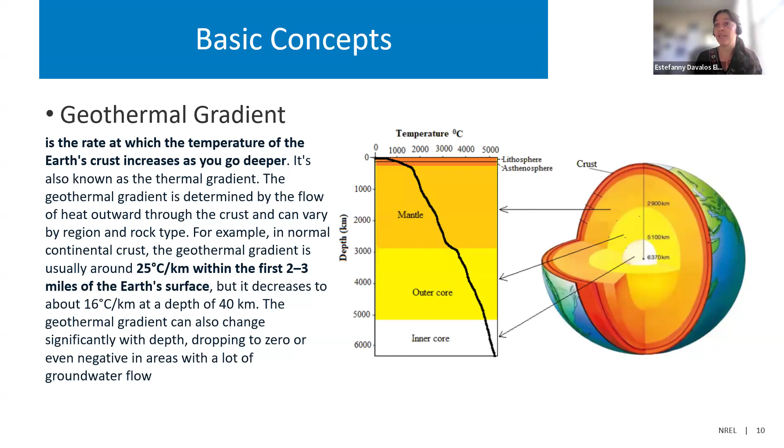Next slide, please. Let's keep in mind that not all the resources are coming from the inner core of the earth. There are some geothermal resources of low temperature that are coming from the sun, being stored in the earth's surface. That heat from the sun is basically absorbed in the soil, and you can store that temperature. Basically, these geothermal resources are shallow and low temperature. There are some geothermal technologies, such as geothermal heat pumps that we're going to explain in a couple of slides, that you can use to utilize these shallow geothermal resources.

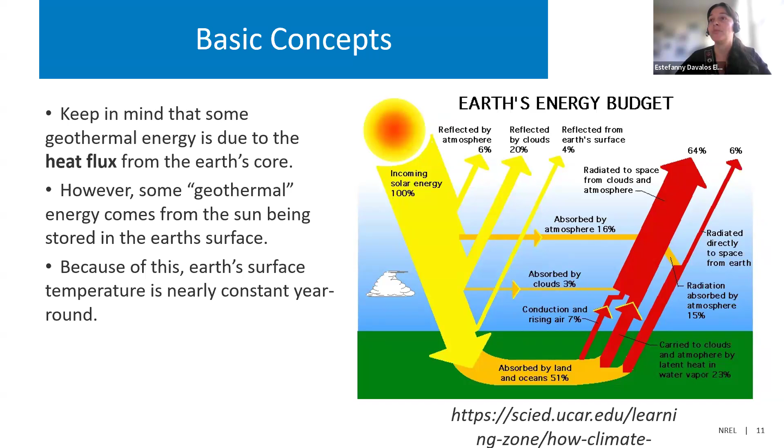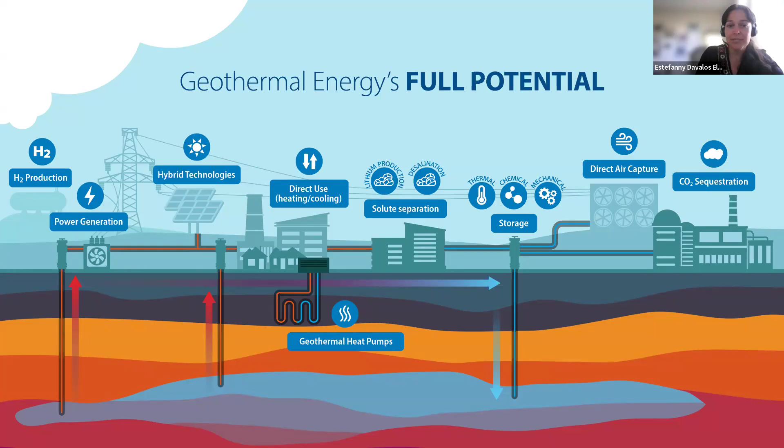Once you start finding more temperature, such as more than 100 degrees Fahrenheit, you can start using this heat extraction for other direct uses. You need water for these - for example, hot water at that temperature to use for greenhouses, fish farming. You can also use these direct uses for heating and cooling. Once you find higher temperature resources, you can generate electricity, and there are different geothermal plants depending on the different temperatures, but basically electricity generation happens when you find a resource of more than 150 degrees Celsius, or in this case, 250 degrees Fahrenheit.

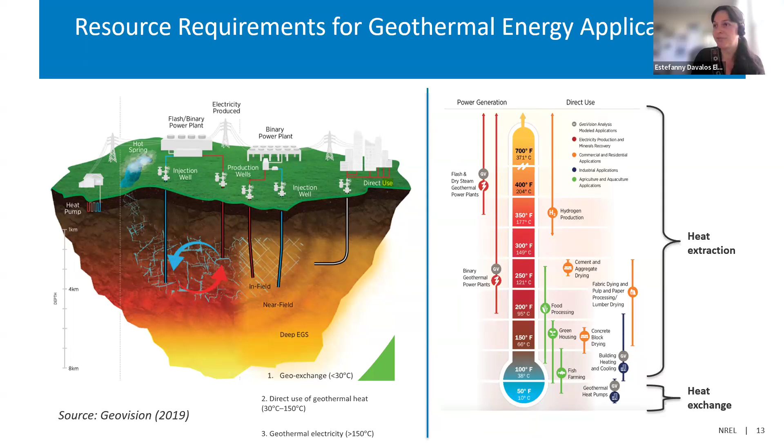Here I want to highlight the importance of geothermal resources in the future of decarbonizing the United States. For electricity, we expect to generate 8.5% of US power by 2050, which will allow us to avoid more than 500 million metric tons of CO2 into the atmosphere. There's also heating and cooling applications that we can develop, with more than 23% increase in the market by 2050.

I want to highlight that heating and cooling can be done using geothermal heat pumps or direct uses. Direct uses means finding the hot water directly. But geothermal heat pumps have the advantage of being a technology you can use across the whole country—it's not limited by finding hot water at different temperatures, depending on the geology and other aspects of the resource.

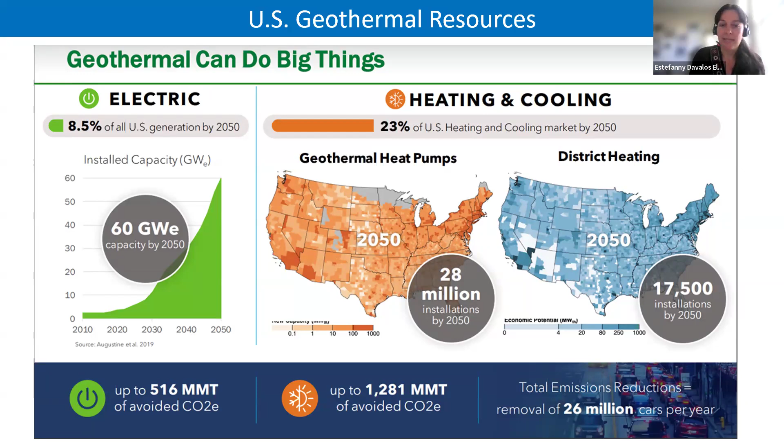Okay, next slide, please.

I want to explain very briefly, in terms of technology, these geothermal power technologies. I'll just explain the conventional geothermal resources, because that's the technology already being used in the market—it's already proven, it's already there.

The limitation of this technology, as I mentioned, is that it's focused in different areas of the country, mostly in the western part of the US, where you can find high temperature resources. Also for this technology, you need a heat source—it can be a volcanic source, which is why you have these high temperature resources.

You also need fluid accessibility, so you need to find water, hot water. You need permeability to allow this water to come to the surface or shallow surface so you can extract it. Sometimes you also need a seal—a layer that creates a trap that avoids the heat and water from being lost.

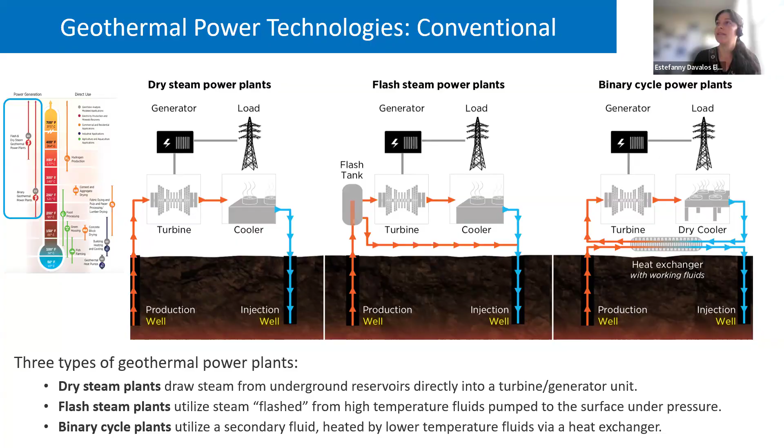Okay, next slide please. So I'm going to start explaining some of the geothermal low temperature technologies, because I think those are probably the ones you are more interested in, like applying in your rural areas.

We can divide these low temperatures into direct uses and geothermal heat pumps. Here I'm going to explain the direct uses of geothermal. Basically, these direct uses need hot water to use these geothermal resources. You can find favorable areas with this resource, and most of the hydrothermal systems are located in the western part, but that doesn't mean you cannot have those in the central or eastern regions - they're just more dispersed there.

The range, as I already mentioned, is between 100 degrees Fahrenheit and all the way to 250 degrees Fahrenheit for the direct uses.

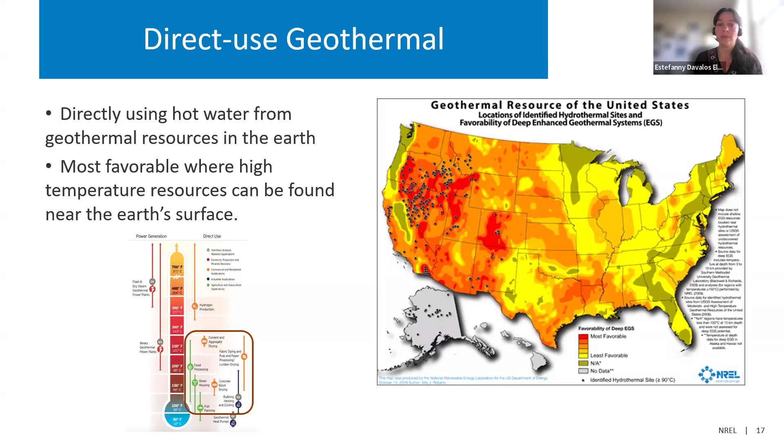You can start with electricity generation, but if you don't have that high temperature resource and only have medium, you can start with heating applications. Then once the temperature of the fluid is lower, you can utilize that for agricultural purposes, such as greenhouses, heating and fish farming, drying crops, etc.

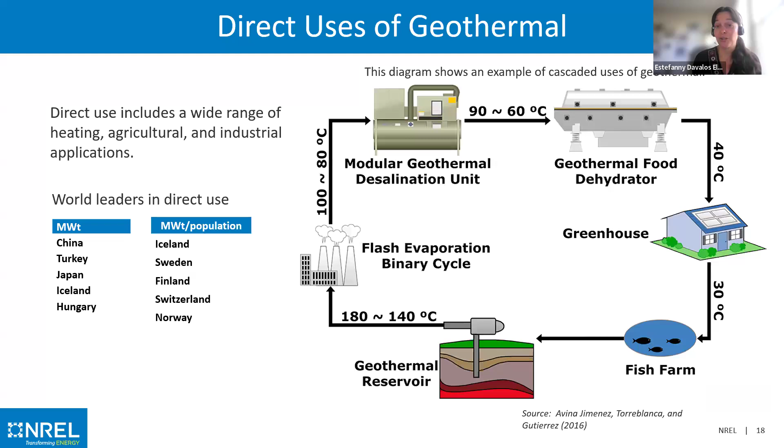This effective approach maximizes the energy use from a single geothermal resource, and it's very environmentally friendly and cost effective. Okay, next slide please.

Here is just an example of how we can use these direct uses. This is combined with another technology, geothermal heat pumps, but I want to mention that there are different direct uses - you can do shallow geothermal heating and cooling technologies, or deep geothermal heating technologies, with these direct uses.

The difference is that you can have a shallow aquifer where you use that temperature for cooling or heating buildings or districts. In the deep geothermal heating, you drill a bit deeper to find the temperatures you want to also heat and cool buildings.

Basically, most of the direct uses are going to be open loop technologies. These wells for direct uses depend on where you find the resource, but you can have depths from 150 meters to 2 kilometers.

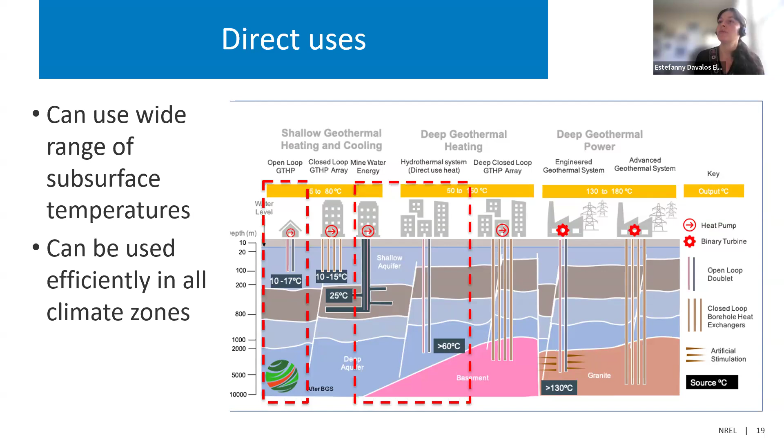Okay, next slide please. Now I'm going to talk about the geothermal heat pumps. These geothermal heat pumps are the ones where you don't need to go very deep - it's just in the shallow part of the earth.

Basically, you are finding this resource in the ground. It has high efficiency due to the constant and moderate temperature you can store in the soil, and you can use this technology for cooling or heating. These resources can be used with temperatures of less than 50 degrees Fahrenheit.

We also know this technology has different names that you can call it, such as ground source, ground coupled, geo exchange, earth coupled, earth source, or water source. Next slide please.

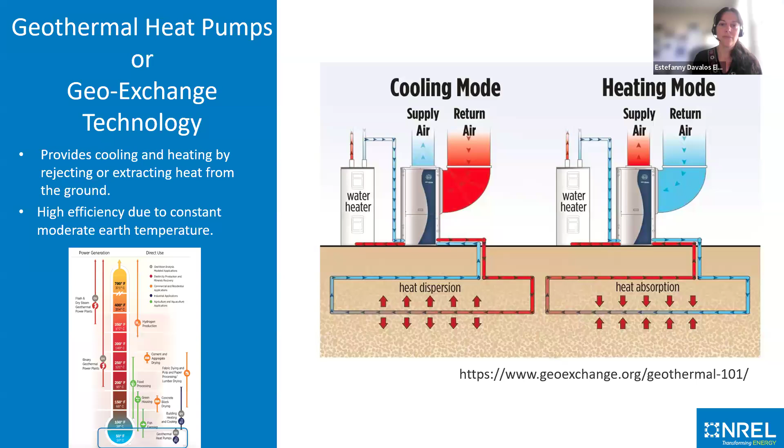So here I just want to explain how these geothermal heat pumps work. A heat pump operates by transferring heat from one place to another using a refrigerant and different components like the compressor, the condenser, the expansion valve, and the evaporator.

In heating mode, the refrigerant absorbs heat from the soil, from the ground, as it evaporates in the evaporator. This low pressure gas then moves to the compressor, which raises the pressure and the temperature. The hot, high pressure gas then flows to the condenser, where it releases heat into the home or building as it condenses back into a liquid state. This refrigerant then passes through an expansion valve, reducing its pressure and allowing it to cool down before returning to the evaporator to repeat the cycle.

In cooling mode, the process is the reverse, extracting the heat from the building or house and expelling it into the ground, basically.

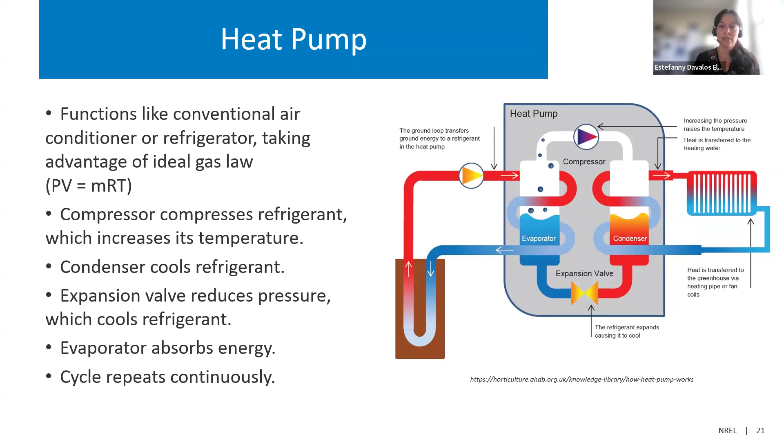Here we have different configurations of how these geothermal heat pumps work. So you have basically three types. They are all closed loop, but the first figure on the top left is a vertical closed loop. The one on the right is horizontal, and the one below is a closed loop system using a pond or a lake.

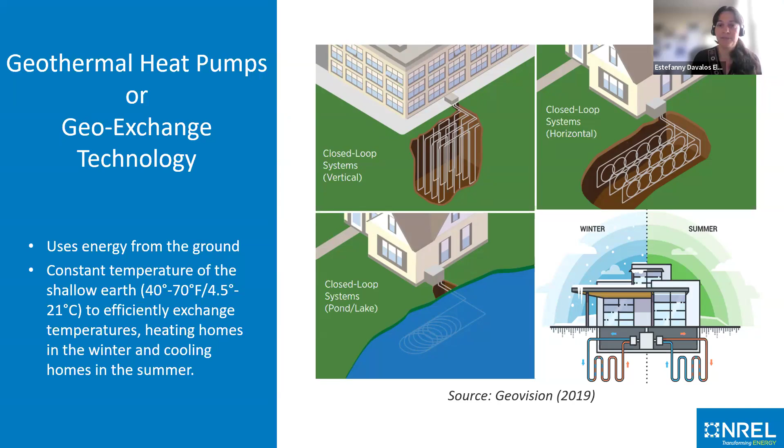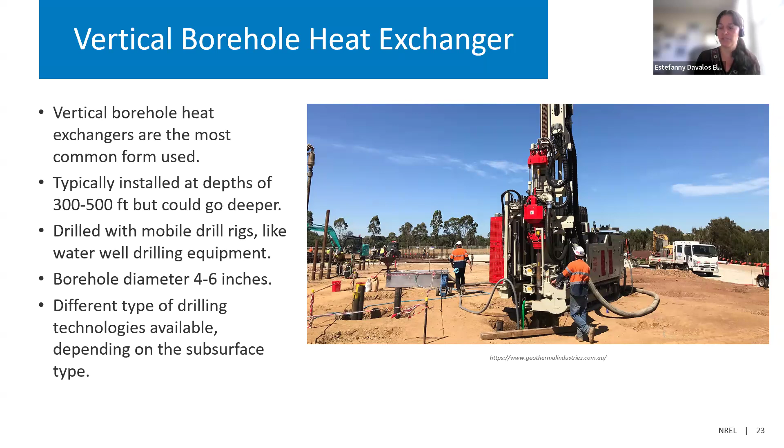The vertical borehole heat exchangers are the most common form used for geothermal heat pumps. Typically you need depths of 300 to 500 feet, but it could go deeper as well. You just need mobile drill rigs like the ones used for groundwater, and the borehole diameter can vary between 4 to 6 inches. There are also different drilling technologies available to create these vertical boreholes for heat exchangers.

There are different types of vertical boreholes. We have the U-tube, which is basically a single U-tube, a pipe connected with a U-bend at the bottom, as you can see in the figure on the left side. It's a closed loop, no fluid exchange with the environment. The area between the U-pipe and the borehole wall is grouted to prevent groundwater contamination.

There is another type, the double U-tube, which is basically two or more U-pipes that can be connected in series or parallel. This decreases the resistance to heat transfer with the soil. The other one is coaxial, where fluid is pumped through the center of the pipe and an annular region. This one requires a casing.

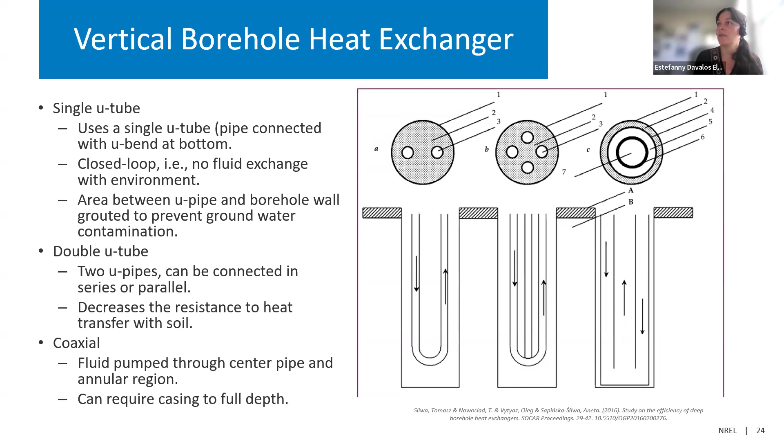As I already mentioned, there are some important aspects of the vertical boreholes. The diameter can be 4 to 6 inches. The pipe can be high density polyethylene, and you have a grout that can be a clay or bentonite mixture to maintain thermal conductivity in the soil. And you have a fluid that can be water with a bio inhibitor, which can be used in cooling-only applications as well.

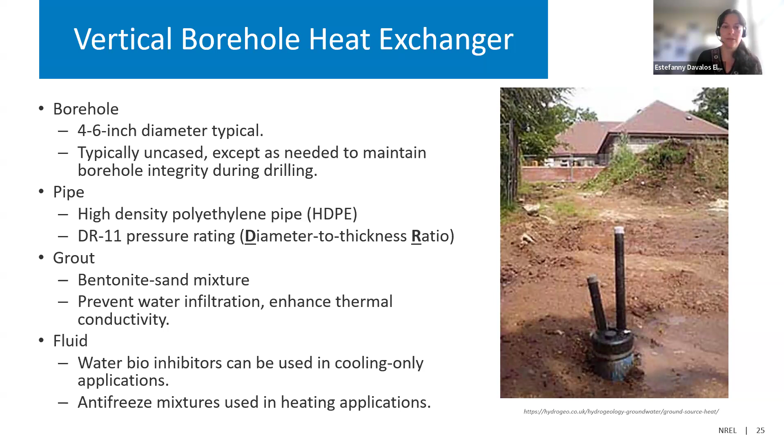The horizontal heat exchanger is another type. This one is a little bit shallower, so it can be installed in the top 3 to 10 feet of soil. You need a higher surface area to make this installation. It has a lower cost to install because you don't need to drill. The performance is lower than the vertical system because the soil temperature is closer to the ambient air temperature during the year.

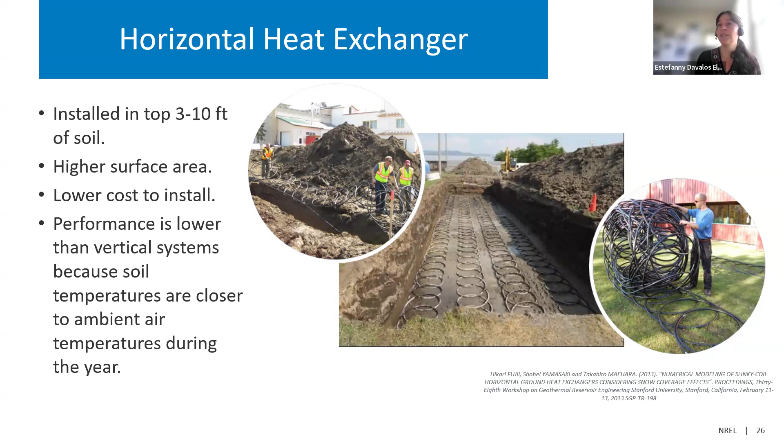This is a surface water heat exchanger where you can use a pond. If you have a lake or pond on the surface, you can use it for this heat exchanger. It can be used effectively when water surface is available, and if designed appropriately, it can be removed so you can do service for these systems. Sometimes it needs freeze protection if you have lower temperatures.

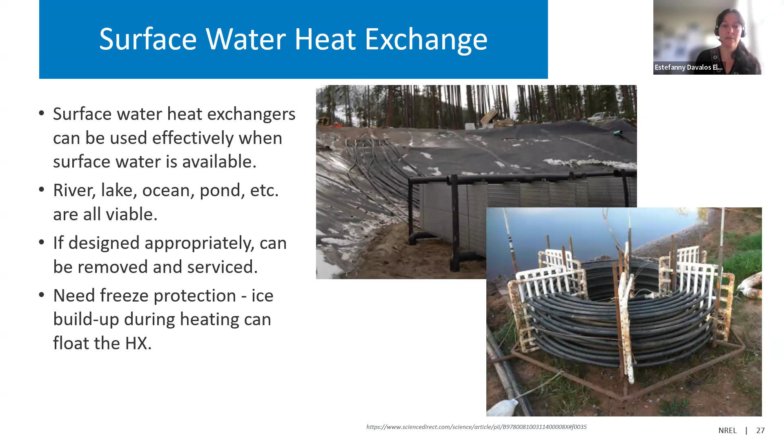Let's talk a little bit about the benefits and considerations for these geothermal heat pump systems. They are very efficient, I think higher than air heat pumps. They have low maintenance and heating savings. Also, this technology helps to decarbonize the country.

Some important considerations are space considerations. As you already see, the vertical system doesn't need a lot of space, but the horizontal loops need a big space, so you can use parking lots, buildings, or green spaces to install this type of technology. The climate zone is also an important aspect, because it will drive the building or home's consumption of heat or cooling.

Also, the geothermal heat pumps depend on the design and the requirements depending on the location where you are installing. And the soil properties are another important aspect here, because the soil properties affect the thermal conductivity and whether the soil is moist or dry. So you need to consider all these to design your system.

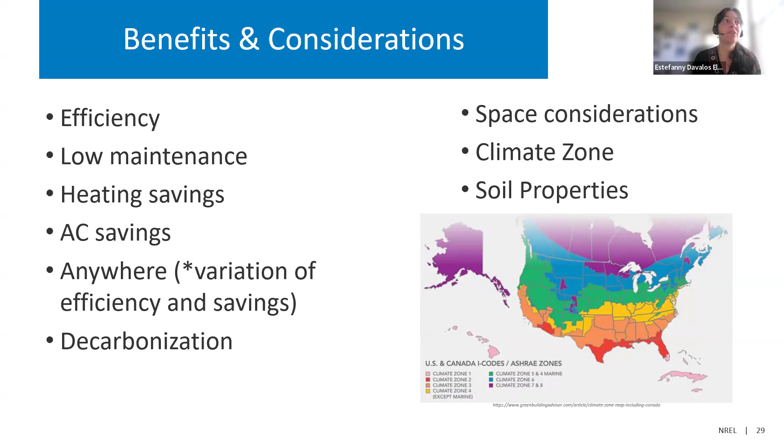My name is Diana Acero Allard, also a researcher here at NREL, geothermal researcher. In the next slides, I am going to show you some applications that are public out there for agricultural activities. I just want to give a disclaimer: to my knowledge, none of these received any technical assistance from NREL. This is information that's publicly available for everyone, but very interesting applications.

One of the first ones is a farm in northern Michigan where they use geothermal heat pumps to heat a greenhouse but also to cool a fridge. So they use two applications there, heating and cooling. There are some specificities about that - the idea is to keep the greenhouse floor always at 90 degrees Fahrenheit. This is claimed on their website - if you look for Coveyou Farm in northern Michigan, you'll see the efficiency and cost effectiveness of the systems.

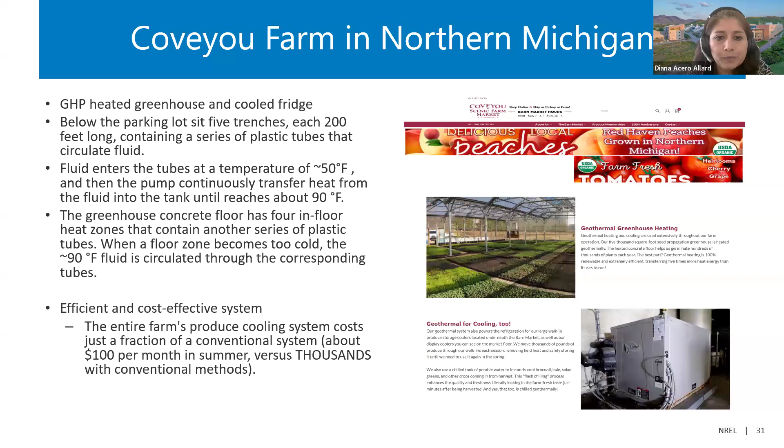During summer, they were paying thousands of dollars before for conventional methods. With these systems, they lowered that to hundreds a month. So it's efficient - it works for both heating and cooling in the northern Michigan zone, for summer and winter. Next one.

This is an example of a greenhouse in Nebraska where they grow citrus fruit, some figs, and other types of fruits. What they use there is a system that comes not only from the geothermal source but is also coupled with other components to take advantage of the solar heat they receive during winter, always keeping that greenhouse above 28 degrees during winter.

One of the resources from the ground is heat at 53 Fahrenheit, only 8 feet deep. It's also mentioned that it has some indirect benefits to decarbonization for transportation, when you think about transporting all this fruit or produce to other parts instead of producing it in the same place - so it removes this transportation component. That's another benefit of these applications. Next.

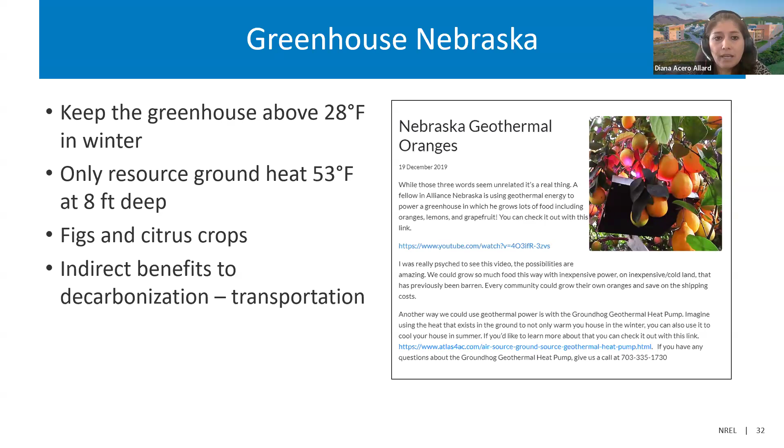This is a very special example - an educational camp in Georgia, in the southern part of the country. Here they use different types of renewable energies for education and for the sustainability of their activities. The geothermal ground loop they use is actually groundwater that is strategically placed in wells to help condition the air in the building.

So we see heating and cooling, we see keeping temperature stable during the year, and also helping with other activities important for agriculture, like air conditioning. Next.

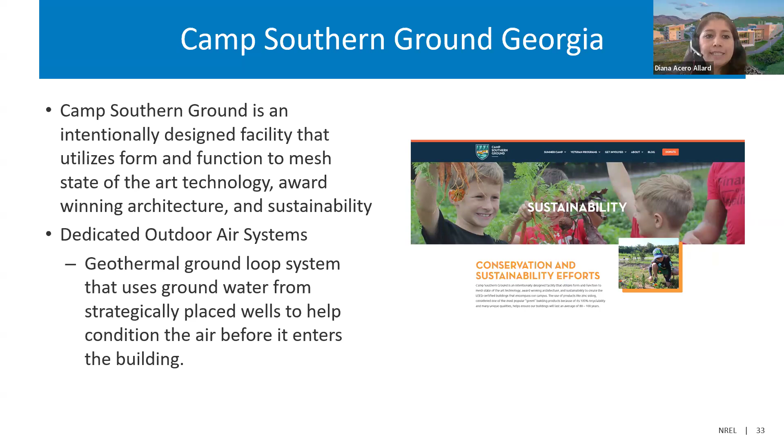When we talk about project development and cost, we compare a little bit with other systems sometimes, and here are some considerations for the cost. The ground heat exchanger, that is the system, is the biggest part of the cost. As Estefanny showed us, it involves drilling and other activities, and that part is the biggest part of the cost.

The actual ground source or geothermal heat pumps are more expensive than air source heat pumps. However, it comes with other benefits and savings in the long term. If the system that is designed needs circulation pumps or other additional components, that can add to installation and operations cost.

When we talk about lifetime, geothermal or ground source heat pumps have a lifetime of 20 to 25 years, while the air ones have something between 10 to 15 years, so something to compare. And the geothermal ground heat exchanger has a lifetime of probably more than 50 years.

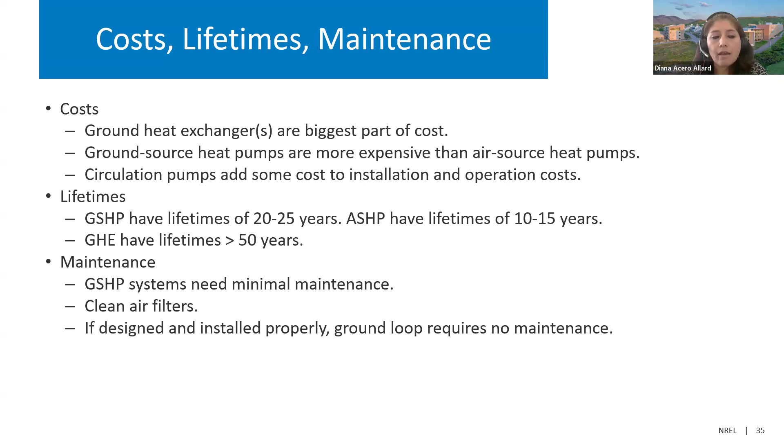The maintenance is one of the benefits. Geothermal heat pump systems need less or minimal maintenance. If it's designed and installed properly, the ground loop requires very minimum maintenance. So it has a lot to do with the design of the full system and the conditions.

Next, I would like to show you some resources. One is systems, software used for modeling, to design how in these heat pumps the soil properties and the system work. There is now in the market the GHEDesigner, an open source software available in GitHub. If you Google it, you will find it. It's open source, developed by researchers, and is in continuous development, which is good for design tools because it's improving. However, this one specifically needs Python knowledge and doesn't yet have an interface for the user.

There are another two that are commercial, not open, and they will need a license: the GLHEPro, which we have seen applicants use for their systems, and it has good benefits. They have different types of geothermal heat pump designs in their databases to compare and include in the system. It's also comparable with the Ground Loop Design, or GLD software, another commercial software available for designing this type of system.

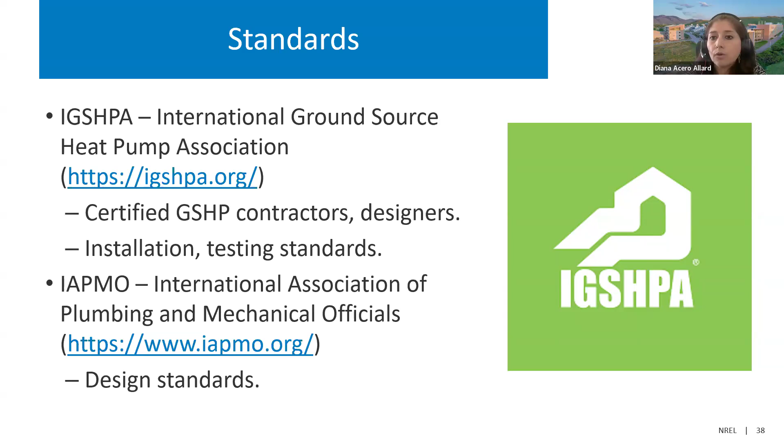In terms of resources, some basic standards you should look for and get information from: one is the International Ground Source Heat Pump Association, or IGSHPA, where you will find standards and training for different phases of the systems, for contractors and designers. Also the International Association of Plumbing and Mechanical Officials for the design standards.

Another resource is the Geothermal Exchange Organization. One important part to mention is that in GeoExchange they have a forum where people talk about their systems, details, or questions. It can be a good resource to find something regional or very local, applicable to your projects, so I invite you to check that one. Also the American Society of Heating, Refrigerating, and Air Conditioning Engineers for different standards and design handbooks.

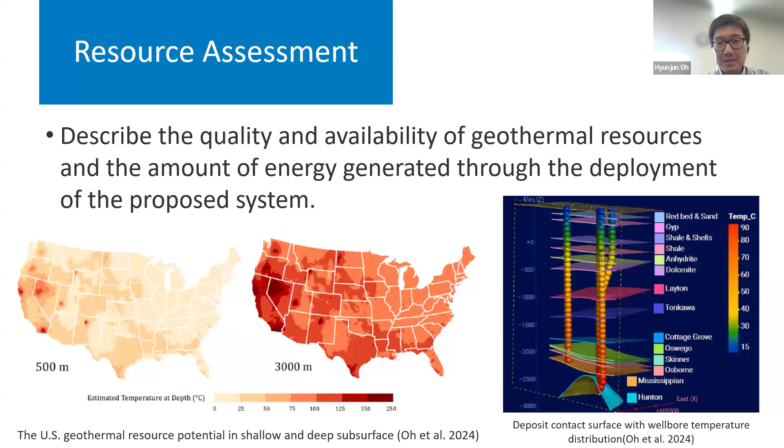Deep geothermal resource potential may be supported from literature review or preliminary monitoring data, or shallow subsurface temperature and soil properties could be supported. Lastly, in this section, the applicant identifies whether all major equipment is commercially available, including proprietary equipment, and justifies how unique equipment is needed to meet the requirements of the proposed design.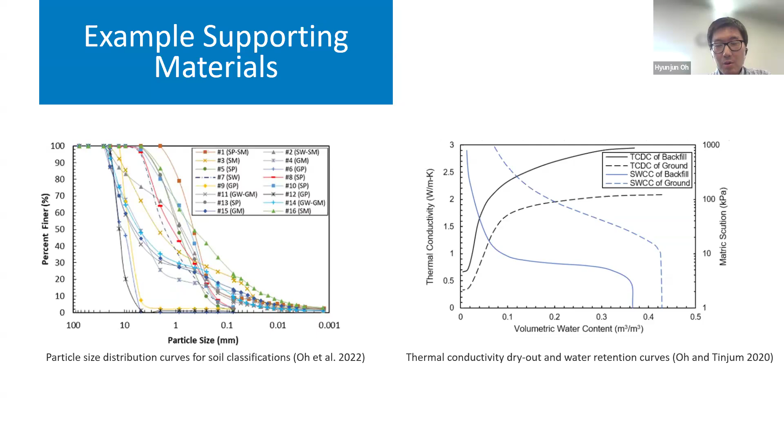Here are some examples that can be obtained from the literature review. If you can conduct preliminary field tests to measure soil properties, that would be an option. The applicant can also consider literature review to collect necessary information about soil type, soil thermal conductivity, and water retention characteristics.

The next section is project development schedule. Here, the applicant describes the overall project development method, including key project development activities and the proposed schedule for each activity. The description shall address cash flow for the project development. Details for equipment procurement and installation shall be addressed in the next section.

The next section is equipment procurement and installation. The applicant describes the availability of equipment required by the system, and describes the plan for site development and system installation, including any special equipment requirements. In all cases, the system or improvements shall be installed in conformance with manufacturer's specifications and design requirements, and comply with applicable laws, regulations, agreements, permits, codes, and standards.

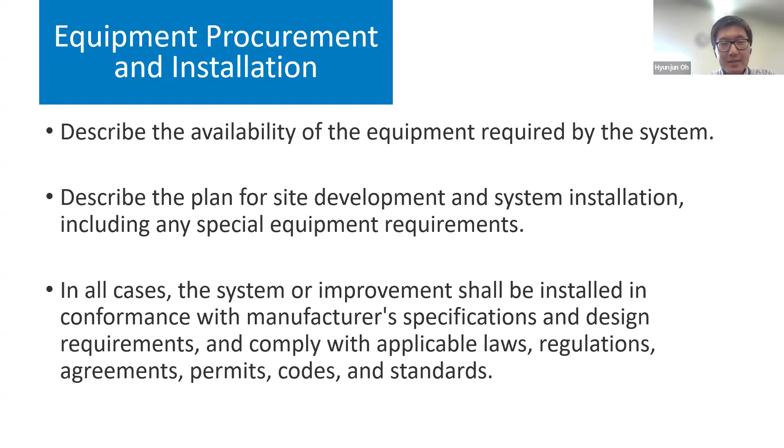In the last section, the applicant describes operations and maintenance plans. Specifically, the applicant describes financial performance of the proposed project, including simple payback estimation. The description addresses the project's initial capital cost, operation and maintenance cost, and revenues, such as applicable investment and production incentives, and other information to allow assessment of the project's cost effectiveness.

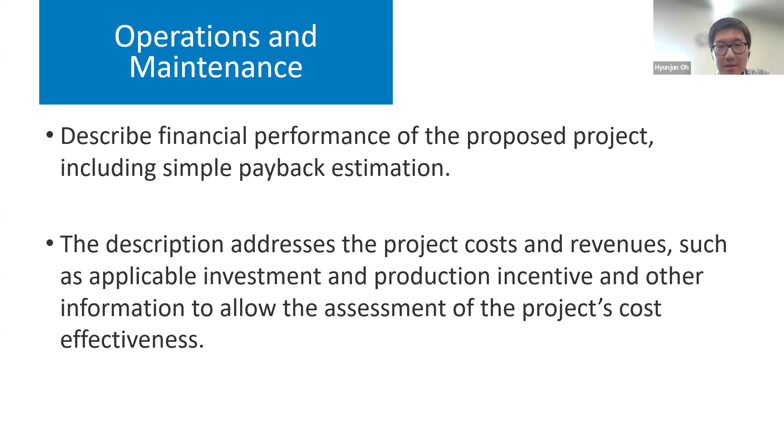So, I've shared brief guidelines to help your proposals, and please feel free to ask any questions.